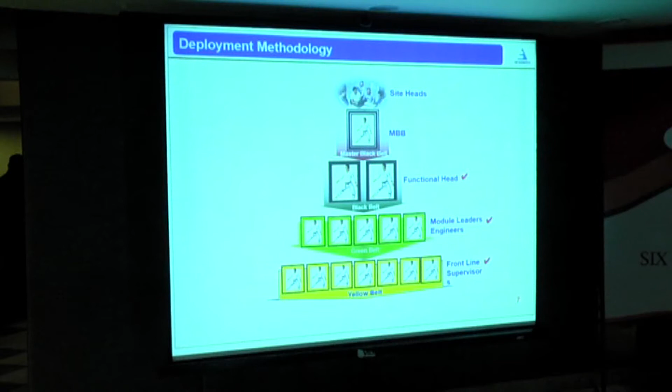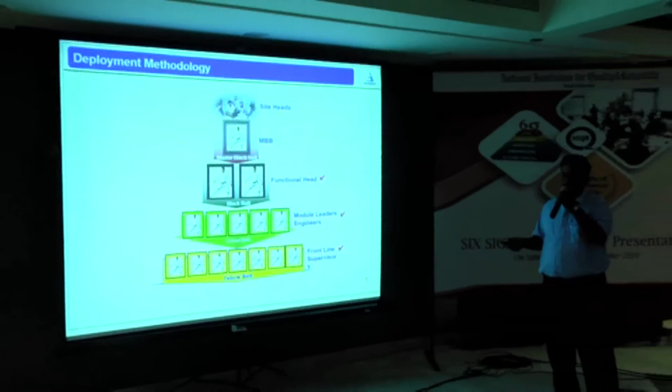This is our milestone. We are certified for TPM excellence in consistent TPM commitment, then IATF, and recently we have been certified to AS 9100. This is our deployment methodology. We start from frontline supervisors who are yellow belt certified, module leaders and engineers are green belt, and function heads are black belt and master black belt, and then site head.

This is our Six Sigma journey. We started the Six Sigma journey with the help of our customer Brakes India in 2015. Now we have completed around five batches and the sixth batch of green belt is under progress, and we completed 12 batches of yellow belt for shop floor supervisors. This is the linkage between our KMI and KPI. We focus on defects in machining in all products, that is GDC, turbine wheel and stainless steel products. These are our objectives. Our yearly objective majorly focuses on customer rejection as per their norms. This is the Six Sigma methodology we follow.

Our project title is Blow Hole Scrap Reduction in 14672901 wheel cylinder machining. We follow the DMAIC approach. These are our project team members and technical supporters. After machining, blow holes are observed. The process background is that blow hole rejection after machining is high, around 1.79%. Previously our customer gave a norm of 2%. Now they revised it to 0.5%. That part number 2901 wheel cylinder is high at 1.79%. The bore surface is a seal movement area and is considered critical to quality. Hence we have taken this defect for reduction, that is CTQ.

This is our project charter. We started the define phase in January and the control phase was completed in April 2019. This is our timing plan. This is our team meeting attendance. Next, the define phase will be explained by Bharat.

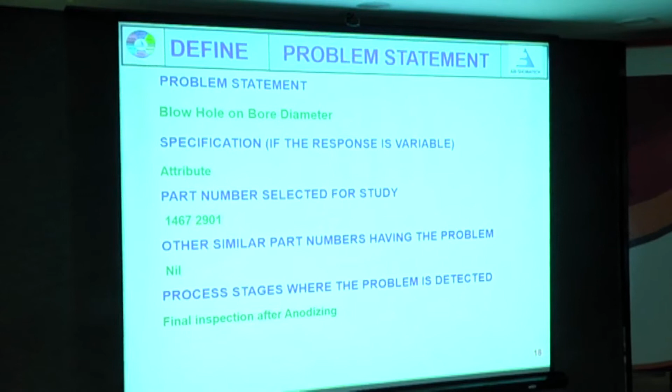Now come to the define phase. Our problem statement is blow hole on bore diameter. Defect type is attribute. For the study, part number 14672901 was selected. Other similar parts don't have the problem. Next, we have separated the product-wise rejection percentage: wheel cylinder, master cylinder, caliper. Wheel cylinder casting has more rejection, 0.91%. So the part number selected is 2901. Last 6 months average rejection is 1.79%.

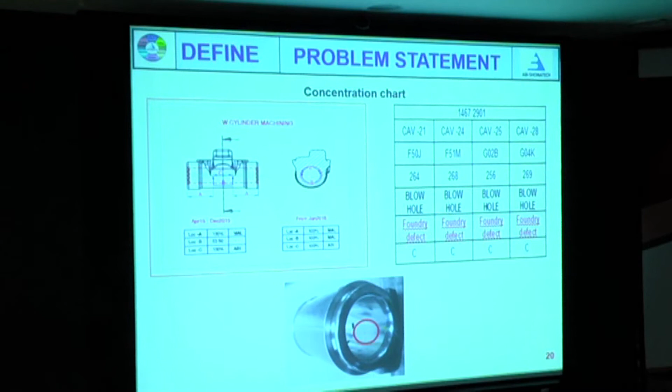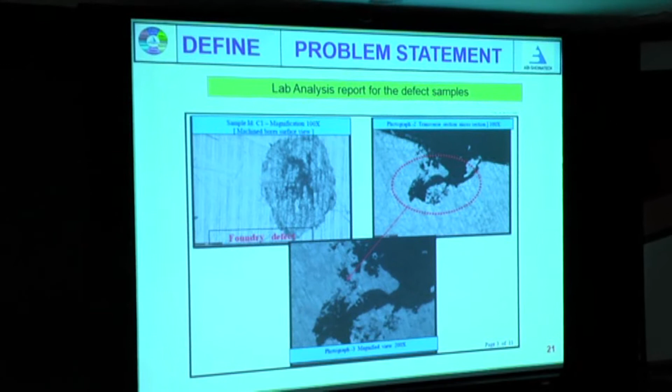Next, we collected the blow hole samples and separated the defects location-wise. Most problems occurred in C location and the bore diameter. Next, the defect samples were given for laboratory analysis, and we confirmed it is a foundry defect, blow hole. This is our process mapping. Our problem occurs in metal pouring in the mold and the detection stage is 100% visual inspection for porosity.

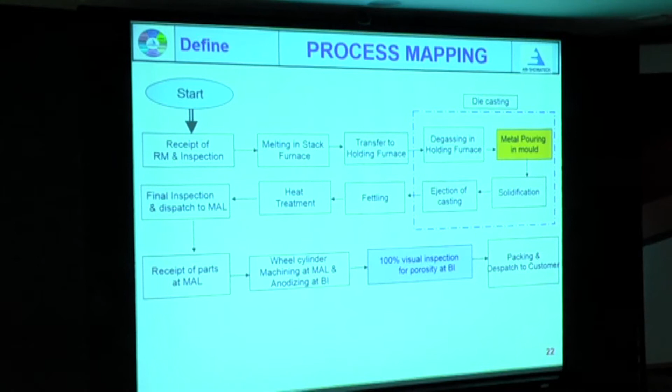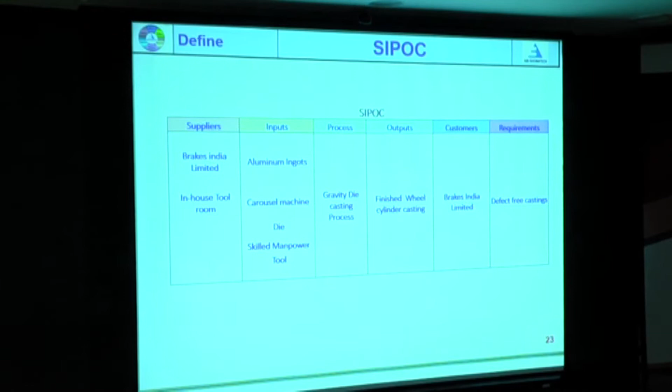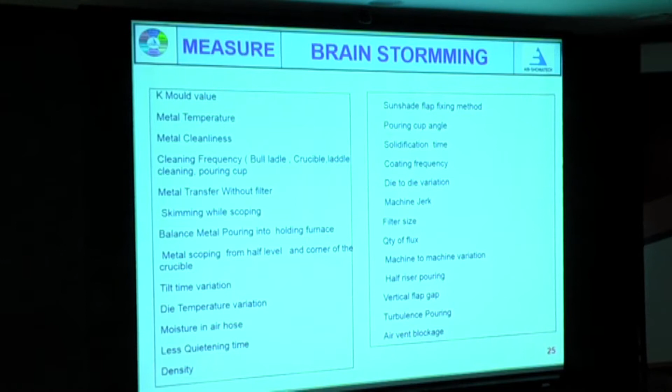Next, this is our SIPOC approach. Process is the gravity die casting process. Requirement means defect-free casting for the customer. Next, come to the measure phase. We conducted a brainstorming session for the blow hole defect and identified the brainstorming points. Next, we separated the brainstorming points into man, machine, method and material.

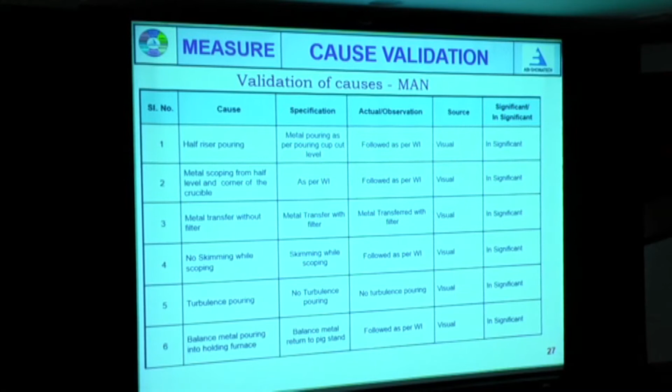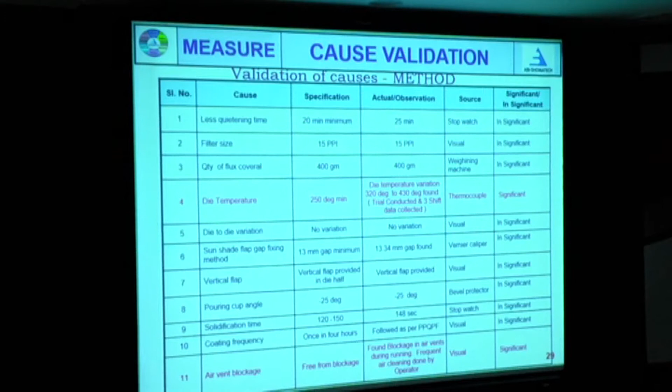We have plotted separately. Next, each cause is validated. For man causes validated, there are no significant characteristics identified. Next, machine causes were also each validated, and there are no significant characteristics. Next, method causes were each validated, and two causes were found significant.

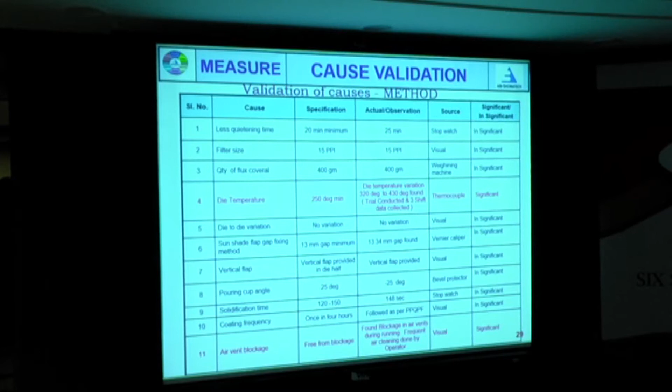One of the causes is die temperature. Die temperature variation is too high, so a trial was conducted for three shifts and data collection to be done. Next, air vent blockage frequently occurred and the operator was frequently cleaning during running production. Next, material causes were validated, and there are no significant characteristics.

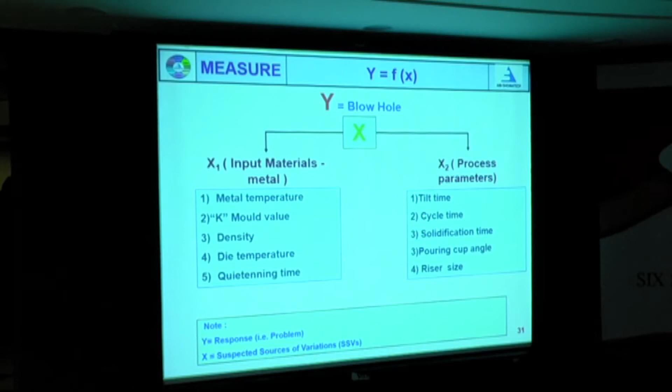Next, our big Y is blow hole. X means suspected sources of variation, separated into input materials and process parameters, like input material, metal temperature, K-mold, density, die temperature, quietening time. Next, X2 means process parameters: tilt time, cycle time, solidification time, pouring angle, riser size. Next, these are our SSVs, specification and method of checking. Next, I hand over to Mr. Sumar.

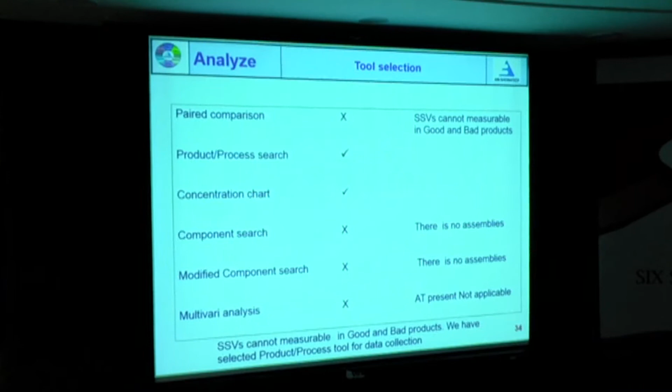Next we see the analysis phase. In Six Sigma Shainin and TQV, first we suspect input parameters, and these are all the tools we have selected for data collection. First we selected product process search and then the concentration chart. The concentration chart we already plotted shows only a single location, location C. This clearly defines it's a process deficiency, and since SSVs cannot be measured in good and bad products, we selected the product process search tool.

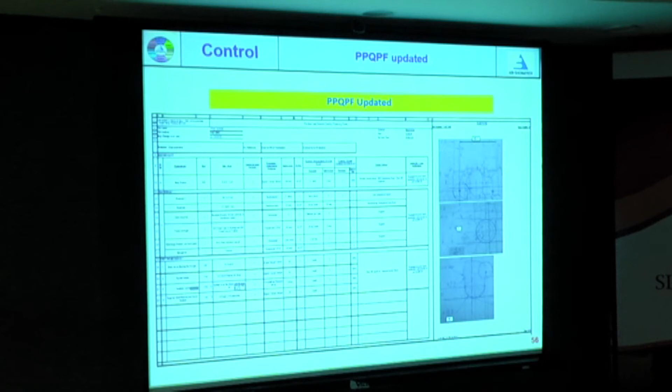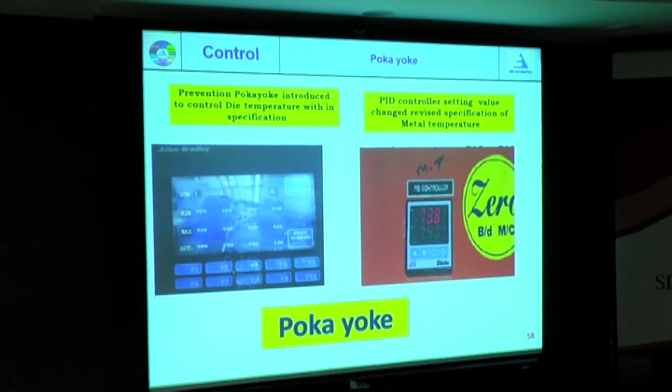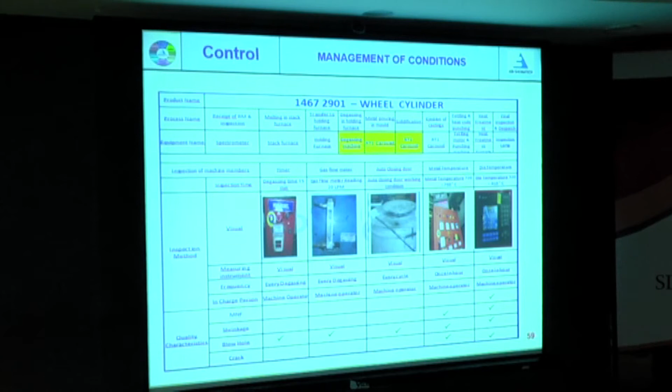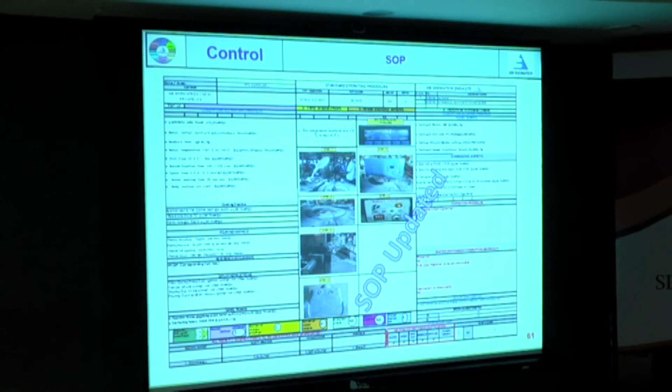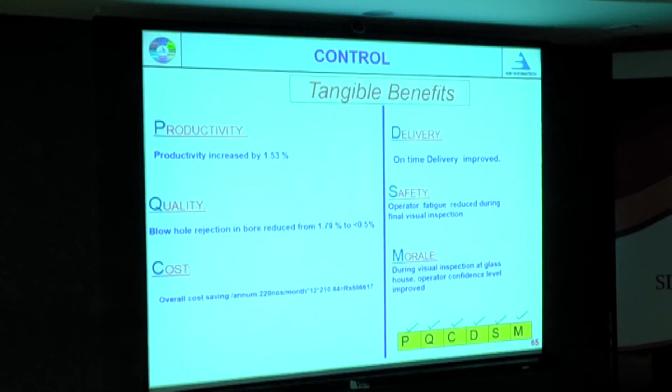Productivity increased 1.53%. Blowhole rejection reduced from 1.79 to 0.5%. The cost saving will be 5.5 lakhs per annum. And on-time delivery improved. Safety: operator fatigue reduced during inspection. And morale: operator confidence level improved. These are the tools used in different phases. Thank you.

Nice presentation, my dear friends. Earlier your die temperature specification was 250 degrees. 250 degrees minimum, sir, minimum. What is the maximum? Maximum around 480 it comes during the process. No, no. What is your defined? As per the control plan, only 250 degrees minimum is given by production engineering. Okay. Now we have changed to a controlled specification, that is 320 to 410.

Great. See, in the study your specification was 250, whereas during the analysis you found out it is ranging from 320 to 420. So now, if 320 to 410 gives a good result, the best result, all the castings come in that variation. Okay, by introducing water cooling, how much heat is getting transferred, or how much control are you having? How much heat is getting dissipated through water cooling?

Yes, sir. With water cooling introduced, the die temperature is within the specification band of 320 to 410; we achieved this after water cooling introduction in the die. No, no. Now 320 to 410 you have specified. How much heat dissipation is happening in the water? Okay.

Okay, that we will measure, sir. No, I understand. My question is the die itself. First, if the die was designed, you are saying it is not there in other parts, only in this part. But what is the temperature from component 1 to component n? Does it increase? Does it remain stable within this range? Your entire thing is about die temperature and die heat dissipation.